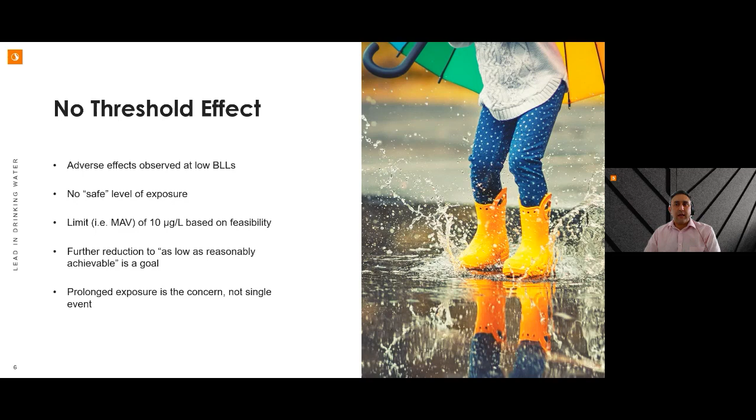So today in many places, drinking water has effectively become the main source of lead exposure, although significantly reduced from past levels. And it's important to know what these sources could be. So firstly, lead can occur in distribution systems even in the absence of frank lead service lines, such as in this image here, a connection between the water main and the service line, which could have been made of galvanized steel or something else, via a lead tailpiece or a gooseneck or a pigtail. It has various names. And these were once used due to their convenient properties, mostly ductility, and reduced risk of pulling on the ferrule connecting to the main and causing a leakage or a break point at the main once the backfill and compaction occurred.

Other sources include components on the premise plumbing or building plumbing side or the private side. And this has always raised the issue of jurisdiction, since often the water supplier's responsibility for water quality officially ends at the point of supply. However, the distribution system physically includes the premise plumbing or building plumbing systems, and the chemistry of the water supplied, in particular its tendency to corrode metals, is important. So there's a duty to ensure, one could argue, that water supplied is sufficiently non-corrosive.

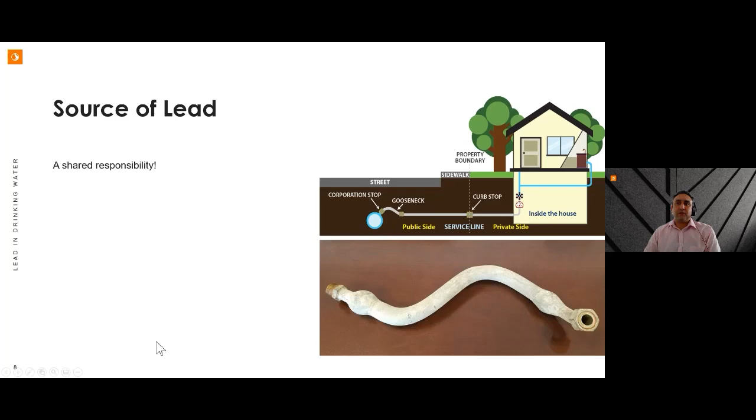And this issue involving the composition of the water supplied and the composition of the receiving plumbing system is often described as a shared responsibility. So sources of lead can include, currently, lead solders. These were once widely used at least in North America until the 1990s, and they've been replaced by lead-free solders for copper piping. However, you can still buy lead solder, because if you're a plumber and you're working on jobs other than potable systems, it's perfectly acceptable to be used in drainage applications, sanitary sewers applications, etc.

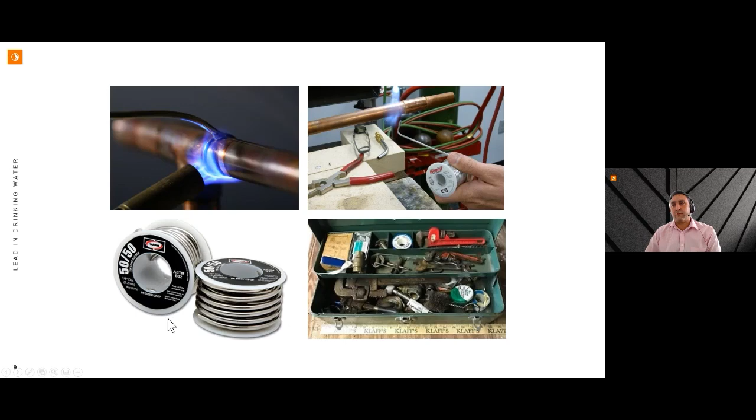And so I've heard utility managers tell me, well, I've seen lead solder in a plumber's toolkit. And yes, it will be there. Whether or not they use it or they're aware of the rules around its use is another question. But more so, though, is the widely used brass and bronze parts. These are common, and historically, lead was added to improve metallurgical or material properties such as machinability.

Up until about 2012 in North America, the definition of lead-free brass and bronze was that it should be no more than 8% lead by weight. And after about the period 2012 to 2014, depending where you are, the definition was revised such that the wetted surface, or the portion of the part that was in contact with water, could be no more than 0.25% lead by weight.

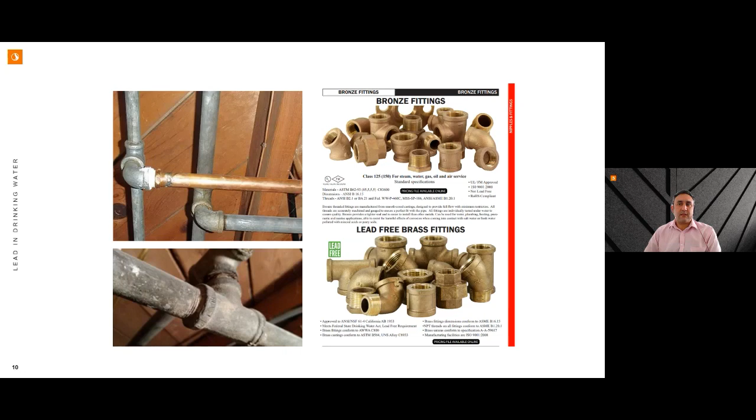Now, such parts are commonly found as pipes and fittings, such as valves, meters, backflow preventers, and in one water supply in Western Canada, housing stock built after 2000. So they had divided the system into pre-1975, 1975 to 2000, and post-2000 housing stock, and conducted a lead surveillance program, which is ongoing. And it was found there was no difference in housing stock post 2000 in terms of lead levels. About 8% of sites sampled exceeded Health Canada's revised guideline of 5 micrograms per liter. So brass parts are suspected as the source, and the co-occurrence of elevated levels of zinc supports this hypothesis.

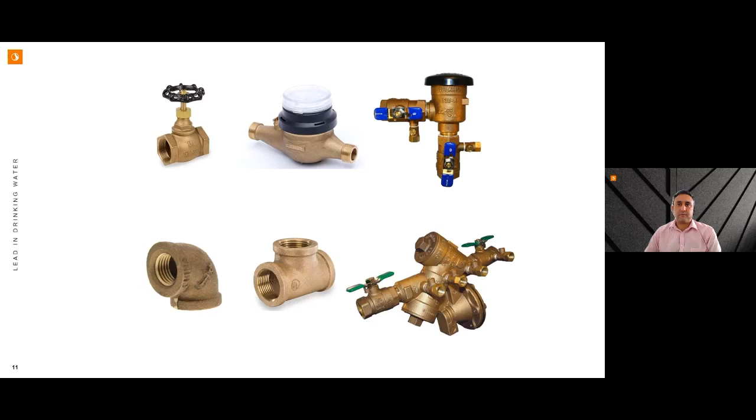So NSF International has developed 2 applicable standards for materials in contact with potable water. There's NSF 61, which relates to the leachability of materials in contact with water and their resulting toxicity, and NSF 372, which specifically addresses the definition of lead-free. So parts that are used for potable supplies in North America, at the very least, must be NSF 61 and 372 compliant. But of course, there's a lot of plumbing systems out there that predate these standards, and therefore would have potentially materials that have the old value of up to 8% or even older values that predate that.

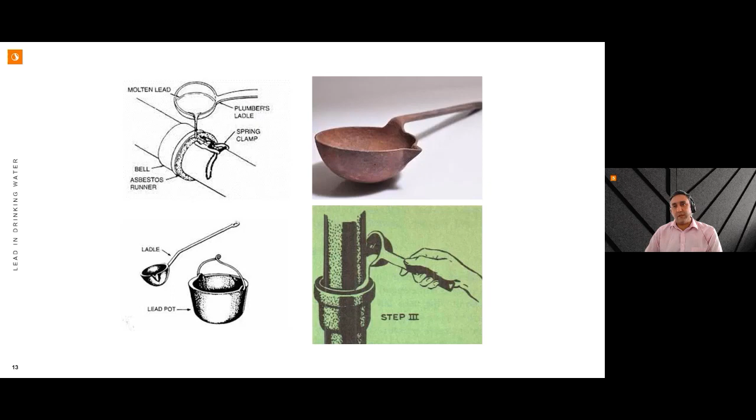I've personally come across lead in municipal systems in surprising places, like the caulking in hydrants, which in New Zealand a different style of hydrant is typically used. But I mean, the word plumber comes from the Roman word for lead, and lead until now is still a very common material in some niche applications, but once it was widespread, and in particular in connections as a caulking with asbestos in between cast iron pipes. Now, after many decades of use, the extent to which that caulking, which should not be in contact with potable water, remains outside of the pipe is probably in general unknown.

Now, one consideration in the setting of a MAV, or a limit for water quality parameters, is the ability to routinely measure and quantify that parameter. There's no benefit in setting the level so low that it can't be verified. Now, there are a few ways of measuring lead. There are a few standard methods that are accepted. The method of choice is typically ICP-MS, or inductively coupled plasma mass spectrometry, which involves quite a large instrument and a specialist to operate, but has the lowest minimum detection limit available, and is able to measure simultaneously a suite of metals in a sample. In general, the practical limit of detection is on the order of 1 microgram per liter or less.

Depending on where you are, there may be differences in opinion on what the practical limit of detection is, but in Canada, it's deemed to be slightly below 1 microgram per liter, using the available analytical instrumentation. Now, it's also important that sample preparation be adequately addressed. There needs to be a digestion period for samples, usually involving trace metals grade nitric acid at a sufficient concentration for a sufficient time in order to capture both the soluble and the particulate lead, which are both products of the corrosion and dissolution of lead-bearing materials. But methods such as ICP-MS will only pick up the soluble portion. So we have to convert the particulate, which can be the overwhelming majority of the sample's lead content, into a soluble one before analysis.

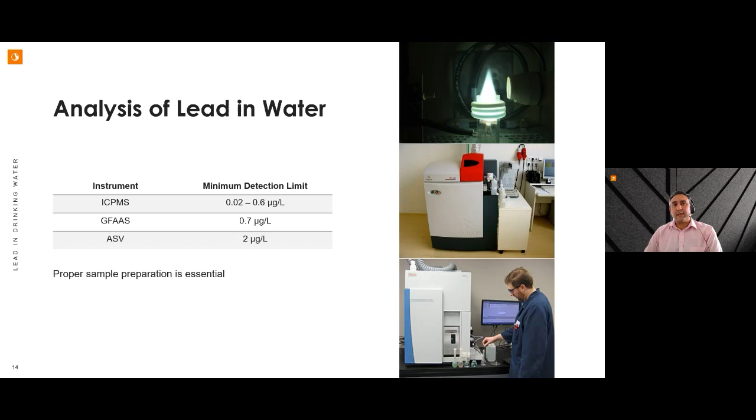Thank you, Laith. So I'm going to spend about the next 15 minutes or so talking about a number of things. I'm going to talk a little bit about lead monitoring and considerations for that. I'm going to talk about if that sampling reveals some elevated lead, how do we go about dealing with that?

How do we deal with that at a system-wide water treatment level? I'll talk about the two main mechanisms, pH passivation and phosphates. And then I'm also going to talk a little bit about sort of localized corrective actions that can be undertaken by homeowners and by the utility and how those play into that picture.

So looking first of all at the monitoring side, a couple of questions to think about. First of all, why go out and start sampling for lead? Well, as Laith has just summarized, we need to sample in order to understand if the drinking water reliably and consistently has elevated lead, and by elevated we might define that as greater than the MAV of 10 micrograms per litre. Lead service lines are not the only issue.

When I started out in the industry in Scotland, the lead level had not long changed from 50 micrograms per litre. It had come down to 25, and of course now being in Canada we've seen that come down to 10, and we're now seeing Health Canada look at 5. So as the levels have come down, perhaps some time ago, lead service lines were really the most likely way in which we were going to see an exceedance of, say, greater than 50.

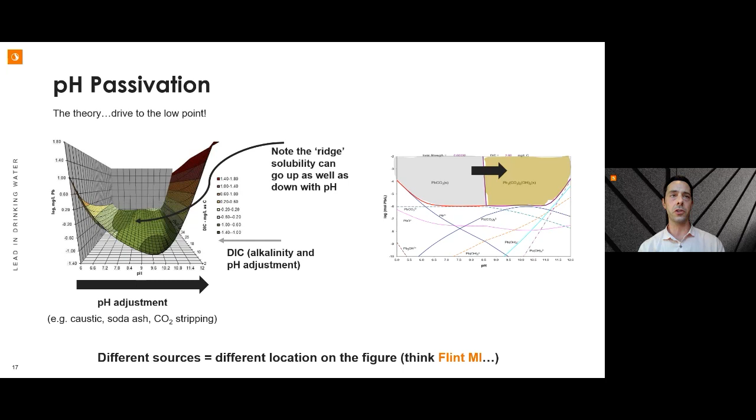I'm going to talk briefly about the second method of lead reduction now, which is orthophosphate. Laith, would you mind advancing that slide? Oh, pardon me. Let me talk briefly about buffering. I forgot about this slide.

One note about adjusting the pH is buffering intensity. Buffering intensity is how resilient a given water is to pH change. The amount of alkalinity in the water has a lot to do with how well buffered that water is. This is most important for waters with lower amounts of alkalinity. When we're choosing that target pH we talked about in the last slide, we're trying to keep the pH there. We don't want it to drift around, and pH can have a tendency to drift down in low buffered waters. And so I just wanted to note this thick black line represents the buffering intensity.

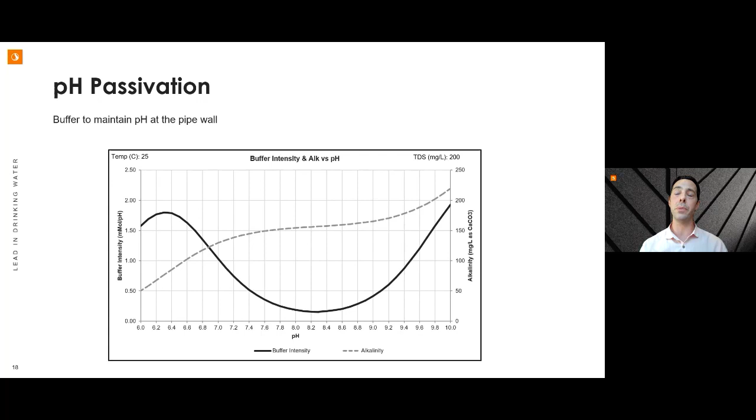It's sometimes a misconception that when we add a chemical that raises the pH and we add a little bit of alkalinity, we also get more buffering capacity. That's absolutely not the case. In low alkalinity waters, pH largely governs the buffering capacity, and it always has a minimum buffering intensity at pH 8.3. And so that's just a note because we need a stable pH for corrosion control to work. An unstable pH is in and of itself corrosive. So Laith, if you'd mind advancing to that phosphate.

So another way, and a very increasingly common way because of the lower thresholds for lead, of controlling lead is orthophosphate. This is a food grade phosphate that we can add to water. Again, another misconception sometimes with orthophosphate is that it's doing something akin to almost relining a pipe, forming some sort of insoluble barrier that serves as a boundary to diffusion. It's not doing this. When we add phosphate to the water, the phosphate actually reacts with that inner pipe wall, the lead pipe wall, and it forms a lead phosphate mineral. And lead phosphate happens to be very low solubility. It just doesn't solubilize very well into water.

And so if we keep on dosing phosphate and keep a steady concentration of phosphate in the bulk water, we form this nice low solubility lead phosphate scale in our plumbing systems or lead bearing fixtures, and we just see a lot less lead come into the water. So that's enough to be said about that.

Oh, one comment: polyphosphates. Polyphosphates actually react almost oppositely, and sometimes this is confusing because they're phosphates too. But when we're talking about benefiting lead corrosion control, we are talking exclusively about orthophosphate. Polyphosphates are used for sequestration, so control of usually iron and manganese, and they'll actually increase the amount of lead in water because they want to grab any divalent cation. They don't care if it's iron or manganese or lead. They will grab that, hold it in suspension in the water and through to the customer tap.

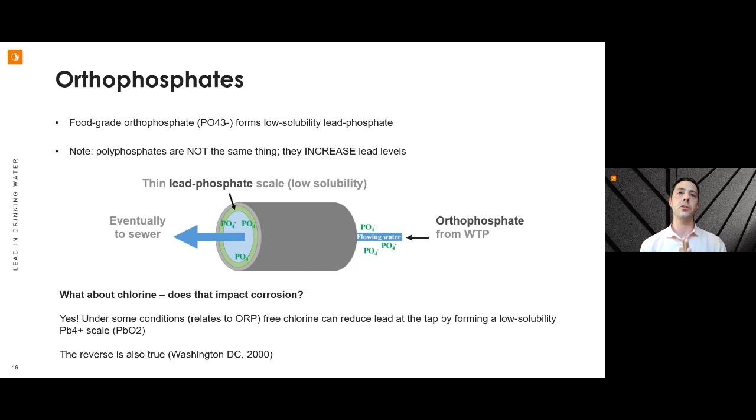And the reverse is true. If we have chlorine maintaining us in a really well oxidized state, and we lose that free chlorine, then we can see lead start to go up. And that was the case for Washington, D.C. when they changed from chlorine to chloramine back in 2000, had a big lead spike as a result.

And so finally, a little note about how we can deal with lead in a more localized way. So we've talked about centralized treatment. Can homeowners help manage lead? Yes, they can. Flushing is very good advice. Flushing water, particularly prior to first use in the morning after that maximum stagnation period, really helps reduce lead exposure. It's great advice. It is not a fix. It's not a long-term solution to a lead problem.

Point of use filters. These are the type of under-counter mounted filters that we could buy from a big box store. It can also be a pour-through jug type. They use activated carbon. These are quite good. There are some which are certified for lead removal, and they can actually be a pretty good fix system-wide for systems that are small enough. By small enough, I define that as less than 500 residents.

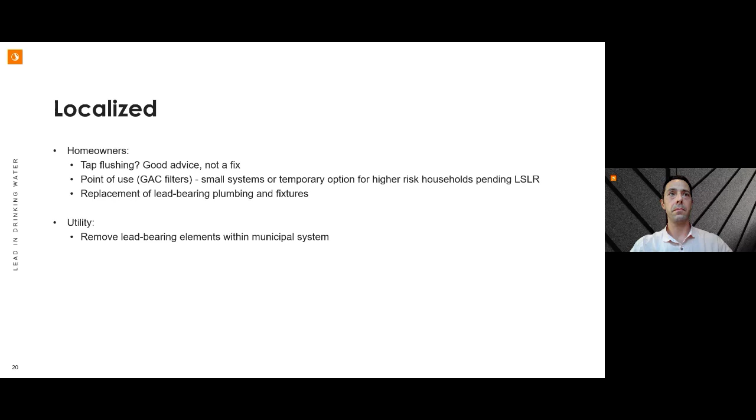And also, these point-of-use activated carbon filters have been used by a lot of utilities. If they know they have lead inventory they want to remove, they've actually issued these proactively to higher risk households with young children, pending those municipal upgrades. So that's so much for the homeowner. On the utility side, effectively try and remove as much lead-bearing elements within the municipal system as possible. As simple as that. And so that rounds up my portion, and I believe we're now going to be handing over to Tom.

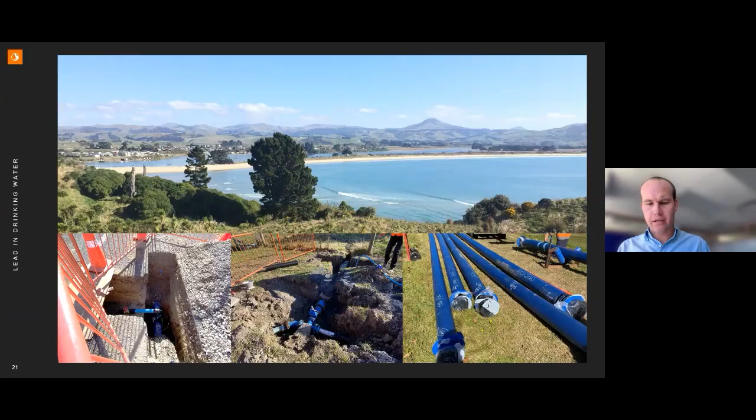Kia ora all, and thank you for the opportunity to share a little bit of our experience over the last few months. Just want to touch on a couple of things first. Both Laith and Simon and Stantec generally have been really supportive in terms of partnering with the DCC and sharing their expertise. We've learnt a lot from these guys in the first few weeks of this event, and latterly as well. Lead in drinking water is a reasonably complex issue, and one that I know we weren't holding a significant level of experience on, and I believe that's probably the case for a good proportion of New Zealand.

Look, I'll give you an overview of where we're at the moment, and there'll be a few things that I won't go into too much detail because we haven't yet shared that with our community, and I think it's right that we are sharing those things with our community initially, and then learning more widely across the New Zealand water sector. So we set out to look at metals in the network as an exercise in looking at corrosivity with an asset management hat on. We're looking to test a couple of hypotheses.

All of that seems completely and utterly inconsequential now, because what we found was quite a variable level of lead and quite a significant level of lead in the first 6 months of testing. That was characterised by a really significant reading on the 8th of December at 39 times the MAV, which is a pretty terrifying number in itself. But when you paired it with all of the other results that we'd had over that 6-month period, it wasn't yet that major trigger for alarm. We've been testing all over our network and at our raw water reservoir as well.